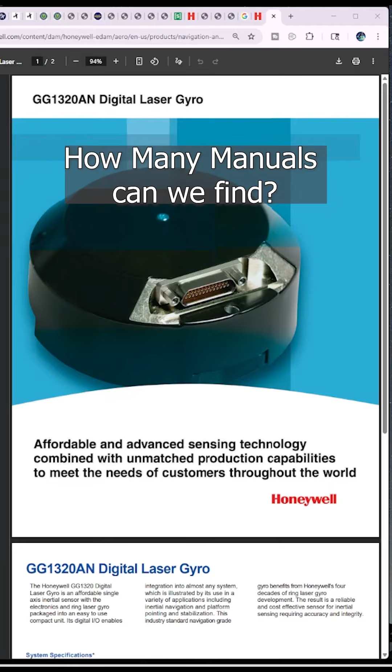There's a flat earther on TikTok named Tron who keeps insisting that no gyroscope manuals mention 15 degree per hour drift or Earth's rotation. He's not a pilot. I've heard claims he was a helicopter maintenance person or something for a while, but like a lot of flat earther resumes, it seems to have a lot of vague and kind of wishy-washy background. Even sounds like he's unsure if that's what he did. So let's do the work he doesn't want to.

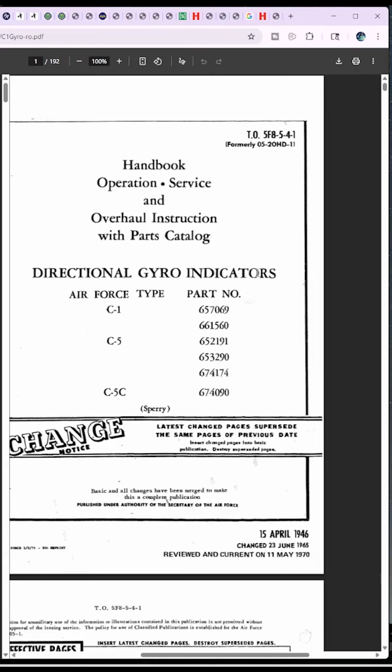So the first one we're going to look at is this Handbook, Operation Services, and Overhaul Instructions Directional Gyroscope Indicators by the Air Force. So right here, the latitude corrector is a calibrated nut which may be adjusted in or out on a threaded stud on the gyro's housing to minimize gyro drift due to Earth's rotation. The drift is 0 at the equator and maximum at the poles.

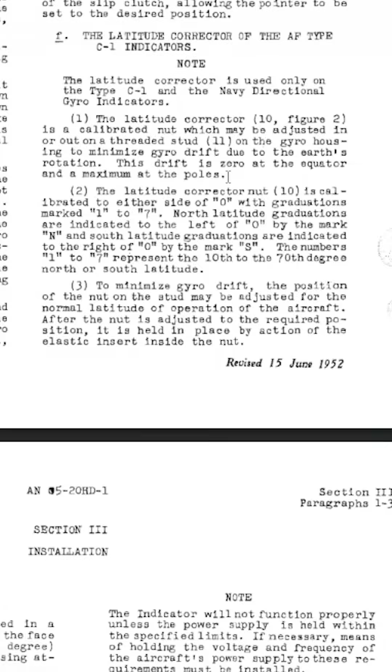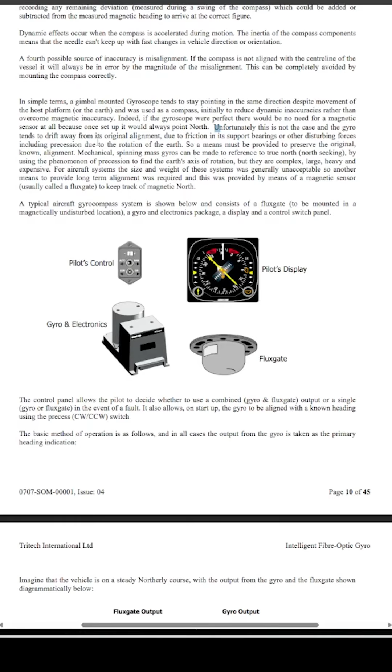Then we have the Intelligent Fiber-Optic Gyro Operating Manual from Tritech. And here we're talking about drift. Unfortunately, this is not the case, for the gyro tends to drift away from the original alignment due to friction in its support bearings or other disturbing forces, including precession due to the rotation of Earth. In that same manual, there's another spot that says, two main sources of drift for the IFG are Earth drift and sensor drift. Earth drift occurs because the IFG measures Earth's rotation as the world spins beneath it. And here's a little diagram.

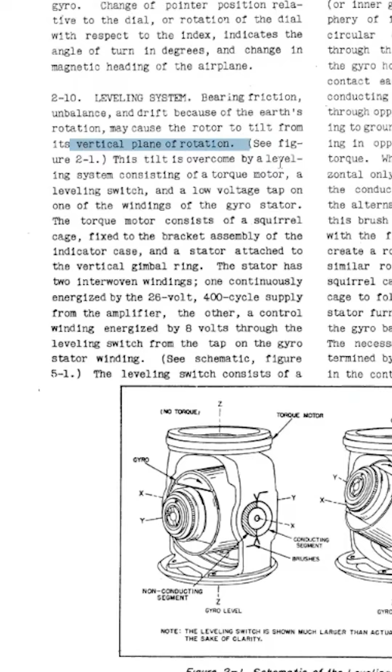Then we have the Royal Canadian Air Force description and maintenance instructions for the Sperry Gyroscope-Compass. In the leveling system, bearing friction, unbalance, and drift because of the Earth's rotation may cause the rotor to tilt from its vertical plane of rotation. From PilotMall.com, watch your attitude, a complete guide to aircraft attitude indicators. Gyroscopic precession. Since the Earth rotates at 15 degrees per hour, the attitude indicators' gyro alignments drift away from the actual horizon over time.

Then we have this from CFI Notebook, heading indicator, precession. Because the Earth rotates 15 degrees per hour and because of small accumulated errors, cause of friction, the HI will drift over time and must be reset.

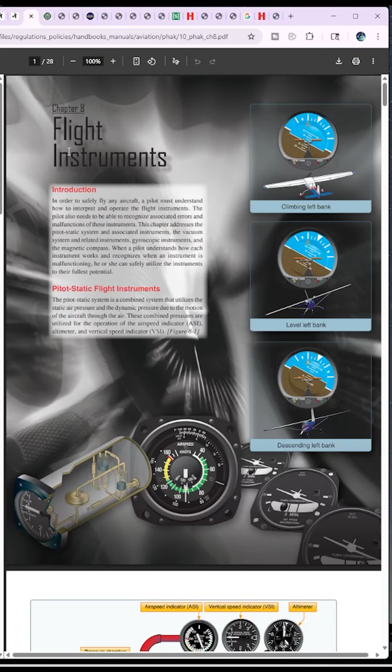This is from the FAA.gov, Chapter 8, Flight Instruments. Talks about precession and whatnot, and it says another error in the heading indicator is caused by the fact that the gyro is oriented in space, and the Earth rotates in space at a rate of 15 degrees in 1 hour. Thus, discounting the precession caused by friction, the heading indicator may indicate as much as a 15-degree error every hour of operation.

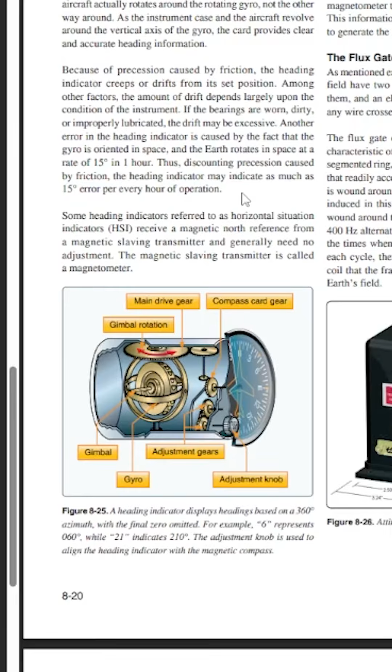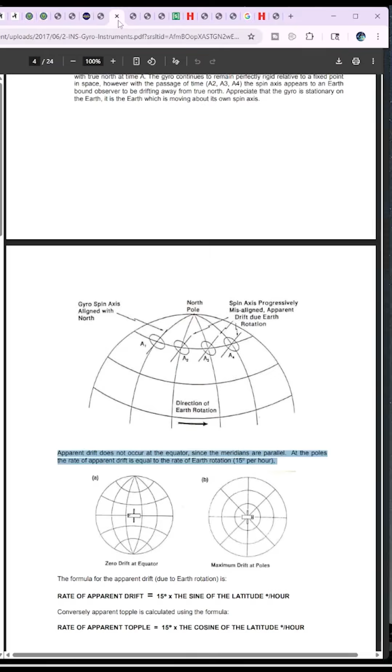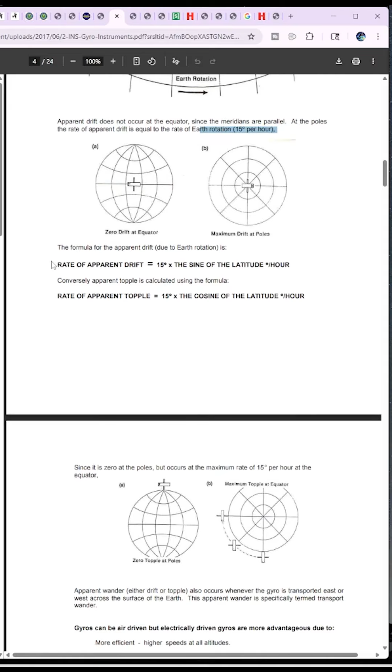Then from goldmethod.com, Instrument Flying Handbook. The Earth constantly rotates at 15 degrees per hour while the gyro is maintaining a position relative to space, thus causing the apparent drift in the displayed heading of 15 degrees per hour. Then on pilot18.com, a company that helps you get your pilot license, gyroscopes. It has diagrams talking about gyroscopic precession. At the poles, the rate of apparent drift is equal to the rate of Earth's rotation, 15 degrees per hour. And you can do math to calculate this.

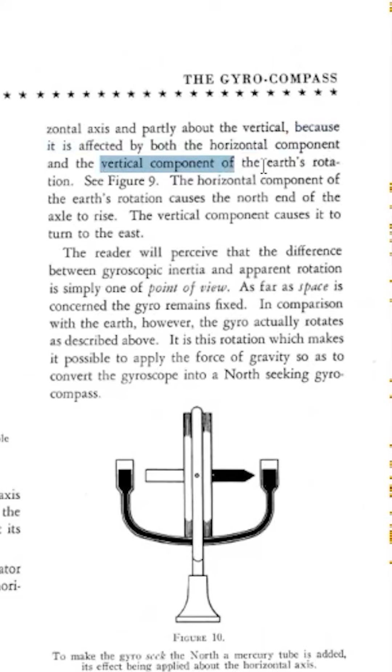Interesting. Sperry, a company that makes them, gyro compasses and gyro pilot manual. Let's see what Sperry has to say. Because it is affected by both the horizontal component and the vertical component of Earth's rotation, and it seems to have all of these diagrams and graphs that show a globe Earth. Another spot in that same manual, as the compass is moved away from the equator, the vertical component of the Earth's rotation begins to take effect.

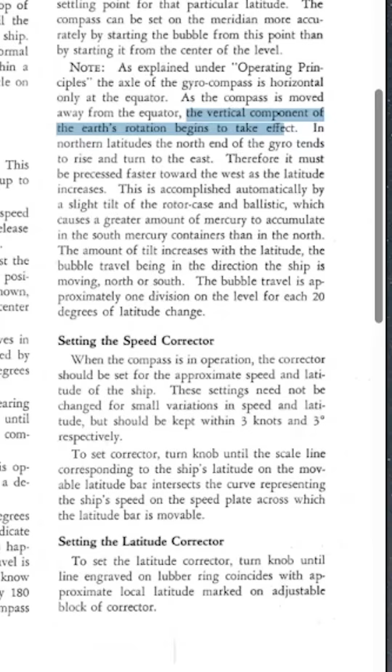Now Tron will cry, that's not a ring laser gyroscope. Correct, ring laser gyroscopes are a different sensor class, and that's the point. Modern inertial systems explicitly model and compensate for Earth rate. RLGs and FOGs are sensitive enough to measure Earth's rotation directly, and the INS and AHRS then applies Earth rate. So we'll learn about that. The INS and IRS, Inertial Navigation System and Inertial Reference System. Gyroscopes must compensate for the effects of the rate which they are transported over the Earth's surface, and for those of Earth's rotation, which is what Earth rate is.

Now, this is a Honeywell ring laser gyroscope. This is the engineering document for that said Honeywell ring laser gyroscope. And when we look in the engineering document, it says a test run of the ring laser gyroscope with an angular random walk of 0.0135 degrees per root hour fixed to a stationary mount and measuring Earth rate produces an Allan variance plot.

So let's clear some things up. Hey Google, what's Earth rate? Earth rate refers to the movement through space, which includes two primary rates, the rotation speed on its axis and the orbital speed around the sun. Now you might not like Google, so hey Grok, what's Earth rate? The term Earth rate blah blah blah. Since you didn't specify, I'll assume you're asking about the Earth's rotation rate.

Since we might not trust Grok, we'll try ChatGPT. What's Earth rate? Earth rate could refer to a number of things. Earth's rotation, 360 degrees in 24 hours. Earth rate in INS, term used in aerospace and navigation, refers to the angular velocity of Earth's rotation. Maybe we don't like those. Hey, DuckDuckGo, what's Earth rate? And wouldn't you know, it talks about Earth's rotation.

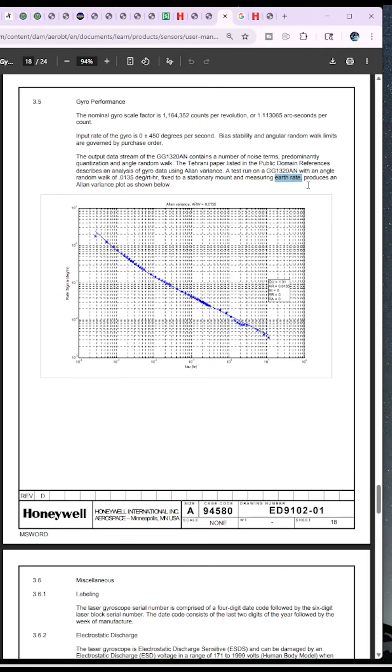So they don't ignore Earth's spin, and that's why you're not seeing it in the little one-sheeter that you like to look at, Tron. They know how well Earth spins, so they just know how to program this thing to compensate for it. So I'd like to thank you for coming to my TED Talk on reading the entire manual. If you actually do the research, the physics, procedures, and documentation all line up.

And if you're feeling really froggy, you can go learn to be a private pilot yourself. It runs somewhere between 12 and 15,000 on the low end. I'm sure you could make that back within a year.